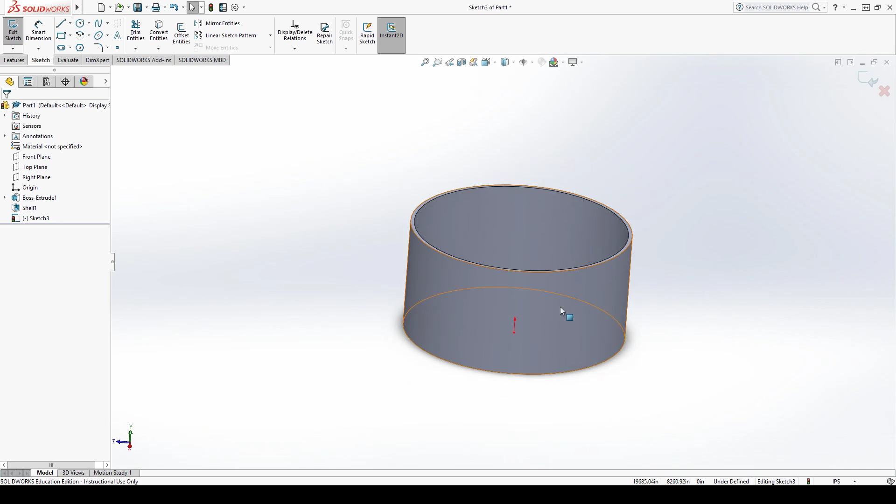I'm in the WatchMen group. We did the wristwatch for our final project. I'm going to do two tutorials, one on how to use the shell and one on how to use the emboss. These are tools that are within Solidworks. We use these tools to help make our final design. This is just a glimpse of how to do it. I was brushing up on my skill to make sure I knew what I was doing.

So you want to start by making a new part. Here we go. Start from scratch. Okay, so we're going to start by doing the sketch. I guess it doesn't matter what plane you pick. Top plane is going to have it extrude upward, so we can do that. We can start by making a circle. You can make any shape you want, but the circle is what we use for the shell of our watch, so that's what we're using here.

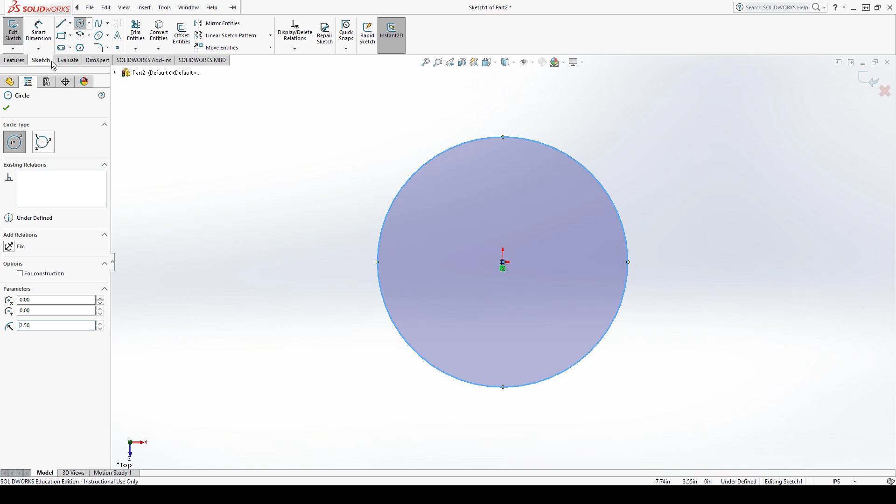Dimensions aren't really important. I guess I'll keep a radius of 2.5. Cool. Then we'll go ahead and extrude this bad boy. Extrude. Again, doesn't matter how much you extrude it by. I'm going to extrude it by, let's do 3 inches, just to get a good idea of what the shell is actually going to look like. Let me zoom out a little bit. Check mark. Cool. All right, so you got yourself a cylinder right here.

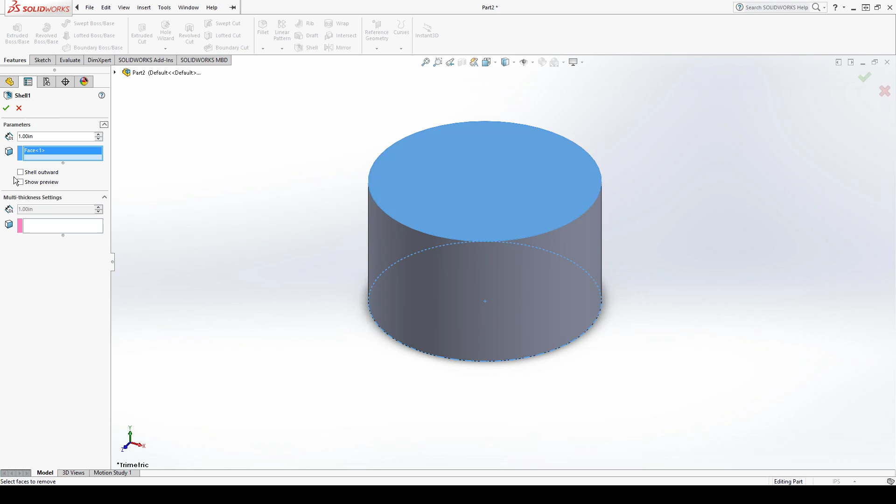Then what we're going to do is we're going to click on shell right here. Remove material from a solid body, create a thin-walled feature. So shell. So by default, it's at 0.10 inches. You can make whatever you want. I'll just show you it at, let's do 1 inch. Be kind of extreme. Okay, I got everything right. Face 1, shell outward, show preview. Yeah, let's see a preview.

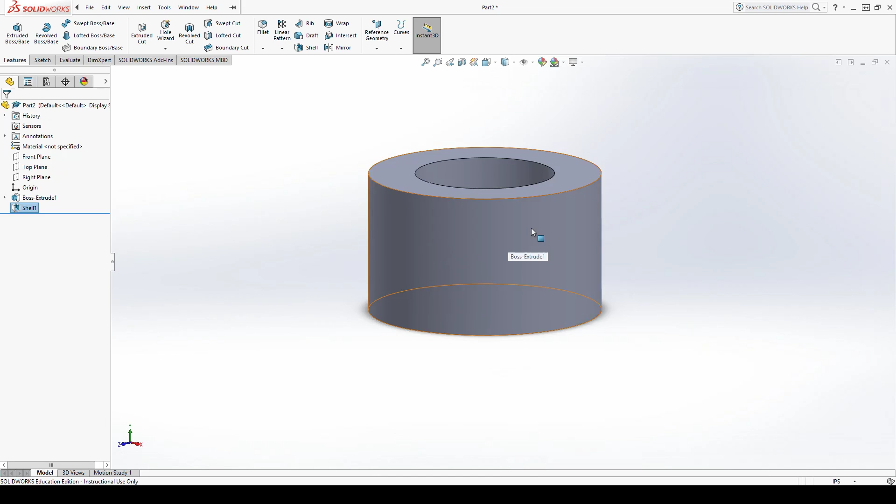Cool. All right, this is the kind of cut that we had for our shell for our watch. Because we wanted the outside wall, and we wanted to have the bottom supported. There's a hole at the top to put in our gears and stuff like that. So I'm going to hit check mark just to show you what this looks like. See, just a little shell. Now, the walls are kind of thick here. This isn't very practical, just to give you an idea. Let's go ahead and change that now.

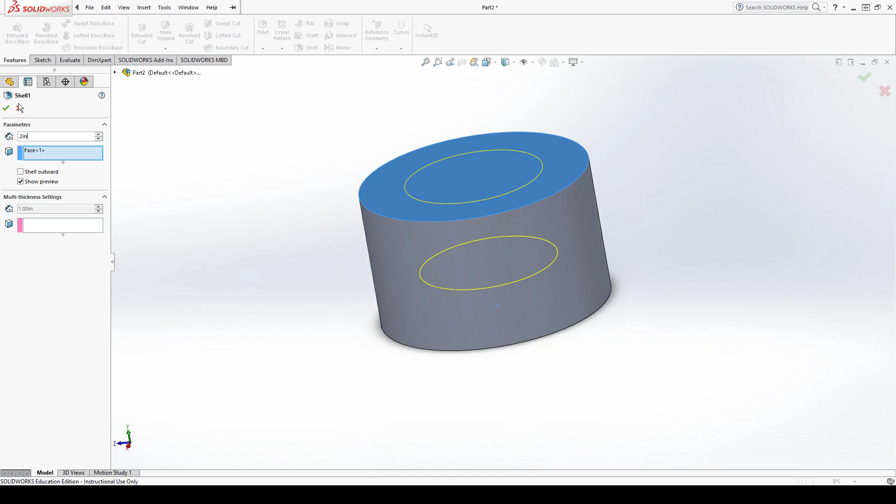Let's put it back at, let's say 0.2, let's make sure that's inches. 0.2 to show you how thin the wall can be. Check mark, see what that looks like. Cool. That's more of a practical little cylinder cup thing you got going on here. The bottom is still there. You got the shell right up here at top. You can put in whatever you want. For us, it was the gears for our watch, but you could do whatever you want, I guess. All right, that's the shell. Up next is the emboss.